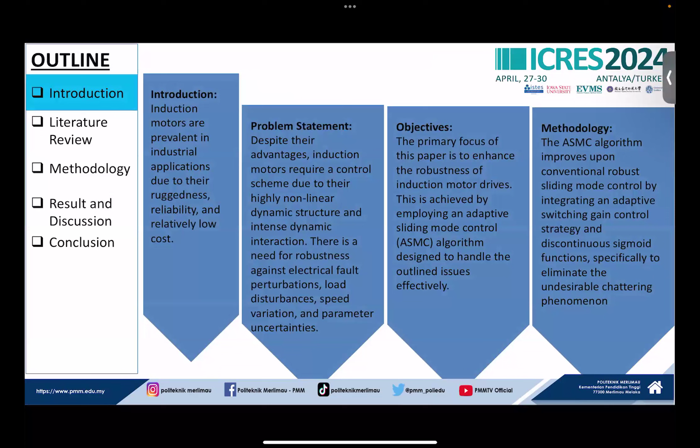So my outline of presentation includes introduction, literature review, methodology, result and discussion, and also the conclusion. So this research is basically based on induction motor drive. Induction motors are used in many applications, especially in industrial applications, because of their ruggedness, reliability and also relatively low cost compared to other motors such as the DC motor.

However, despite their advantages, induction motors require a control scheme due to their highly non-linear dynamic structure and intense dynamic interaction. There is a need for robustness against electrical fault, load disturbance, speed variation, and also parameter uncertainty. So this research focused on designing a robust induction motor drive. This is achieved by employing an adaptive sliding mode control algorithm designed to handle the outlined issues.

So the adaptive sliding mode control improves upon conventional robust sliding mode control by integrating an adaptive switching gain control strategy and discontinuous sigmoid function to eliminate the undesirable chattering phenomenon. This chattering phenomenon appears in conventional sliding mode control.

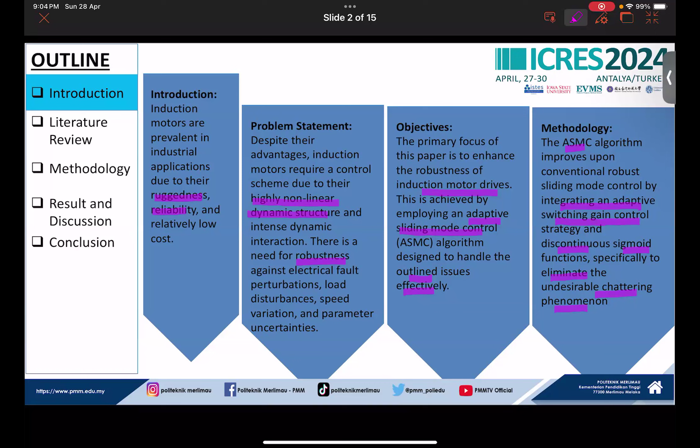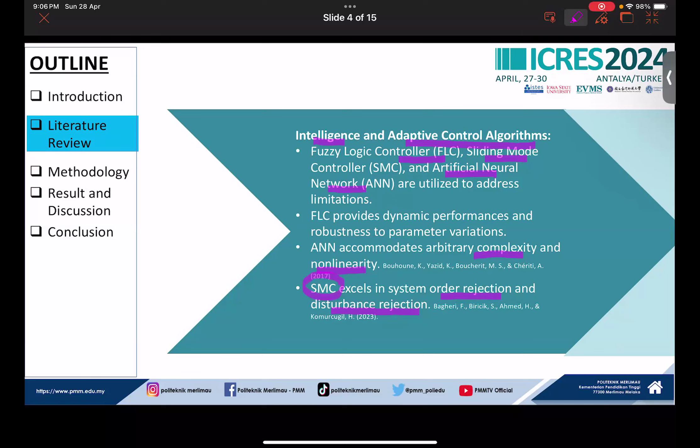Fuzzy logic controller provides dynamic performance and robustness to parameter variation. The ANN accommodates arbitrary complexity and non-linearity. And the SMC excels in disturbance rejection. So in order to deal with robustness, this study focused on the SMC application in induction motor drive.

So basically, there is the conventional sliding mode controller. This sliding mode controller has a chattering phenomenon due to large switching gain in the equation itself, in the SMC itself. This is an undesirable effect caused by external load disturbance and parameter variation.

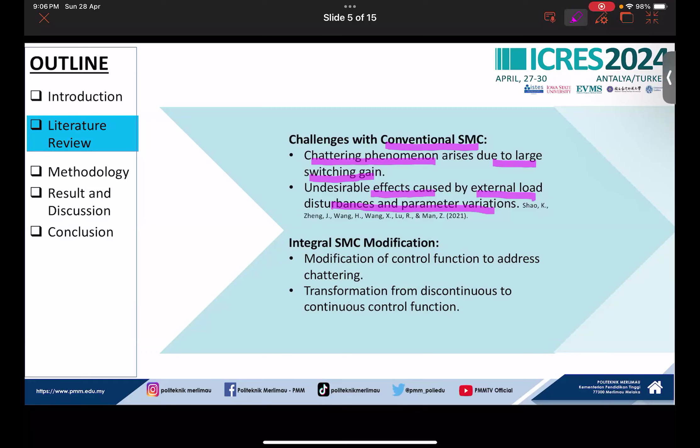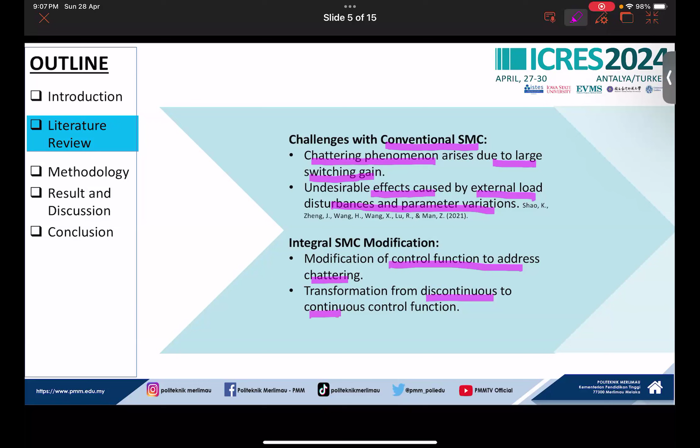So this classical SMC is technically prompted with integral SMC, a modification of the control function to address the chattering, a transformation from discontinuous to continuous control function. So basically the classical conventional SMC uses a discontinuous function, while this integral sliding mode control uses a continuous control function.

So this research also introduced the proposed adaptive switching gain control strategy, which aims at overcoming instability and achieving smoothness in control performance. And also it introduces a new algorithm, a modified classical sliding mode control with variable gain dependent on the system state, to reduce chattering and enhance its robustness.

So this is the control system employed in field-oriented control. This IFOC, indirect field-oriented control, is a widely used method in controlling induction motors. This is the speed control where the SMC, sliding mode control, is implemented in the controller. It utilizes adaptive sliding mode control for speed regulation, ensuring robust performance in varying conditions.

Additionally, we have two PI current controllers employed in the inner loop. There is an outer loop and inner loop. The PI is employed in the inner loop to process the error signal of the voltage command, enhancing control accuracy.

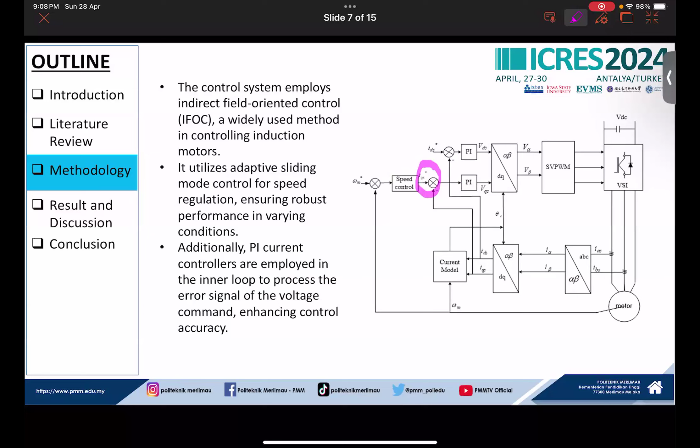So basically, this is the conventional sliding mode controller equation, where IQS is the output from the controller, the conventional sliding mode controller output from the speed control. It uses the signum function, which is 1 to -1. That is what we call a discontinuous function.

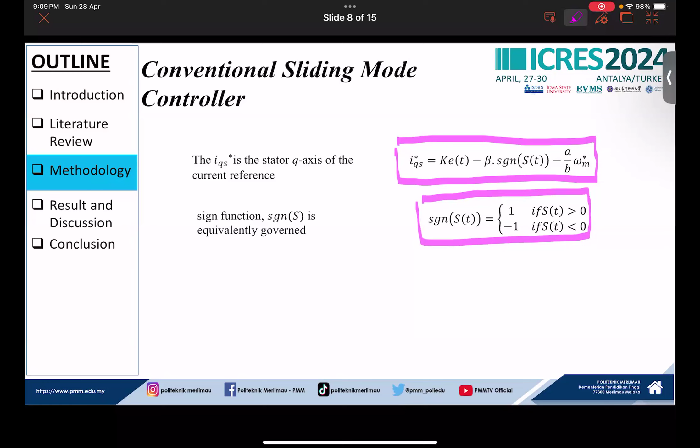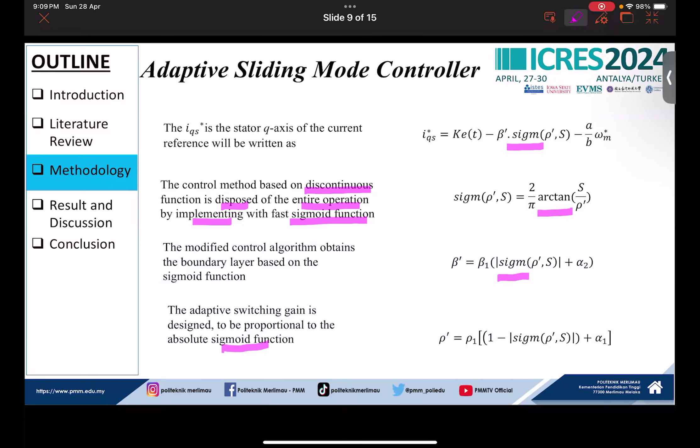So in adaptive sliding mode control, we use IQS, which uses the sigmoid function. Whereas the sigmoid function is actually using the arc tangent formula. The control method based on the discontinuous function is disposed of by implementing a fast sigmoid function with arc tangent algorithm. So the modified control algorithm obtains the boundary layer based on the sigmoid function here. So the adaptive switching gain is designed to be proportional to the absolute sigmoid function as mentioned in the formula.

So this is the result, a simulation study based on the cases for comparative performance of different speed controllers with no load.

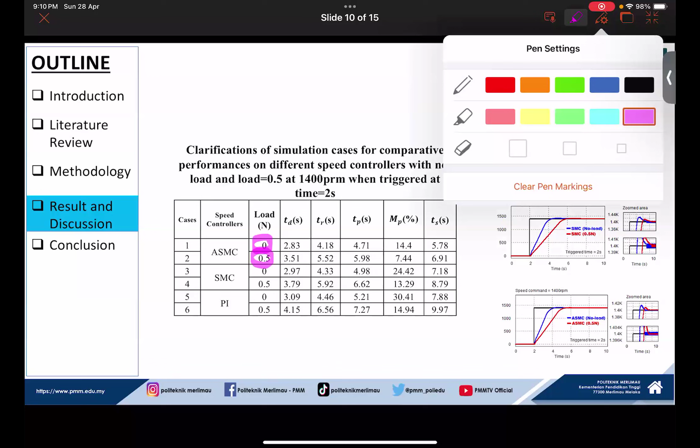And loaded condition. So we have two conditions, which is no load and loaded condition, 0.5 Newton meter. So in this table, we have three results here. This is using PI controller, traditional SMC, and also adaptive sliding mode controller. So the table shows the summary of the comparative study of the three speed controllers,

operating at 1,400 RPM. I did the research for two different speeds, which is 1,400 RPM, the rated speed, and also the lower rated speed, 350 RPM. So the induction motor speed performance is clarified using time domain specifications: delay time, rise time, peak time, and also the maximum percentage of overshoot, and also the settling

time. As we can see here, the adaptive sliding mode control demonstrates robust performance with moderate overshoot and relatively short settling time under both no load and loaded condition. On the other hand, the sliding mode controller exhibits faster response time, but at the cost of higher overshoot and longer settling time.

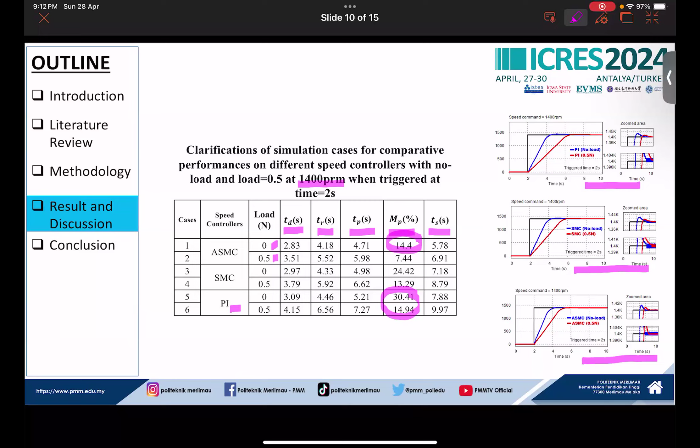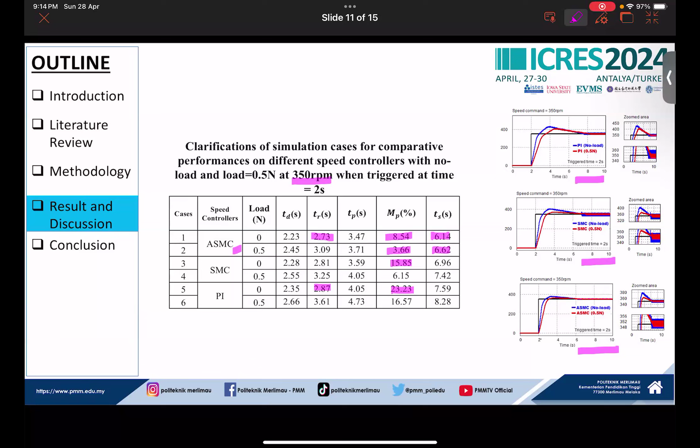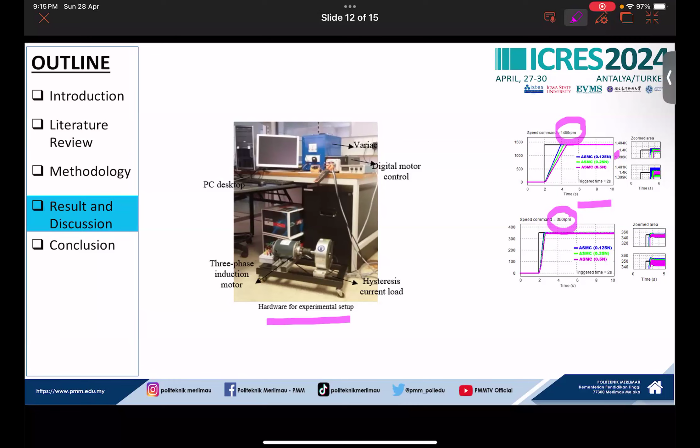So we did this experiment based on 3 different load conditions, which is 0.125 Newton meter, 0.25 Newton meter, and 0.5 Newton meter. So this is the result based on the experiment of the adaptive sliding mode controller. I classify it into case 1, which is 1,400 RPM, and case 2 for 350 RPM, where both are tested with 3 different

load conditions. In case 1, the adaptive sliding mode controller exhibits remarkable performance adaptability to different load conditions, showing rapid rise time, minimal overshoot, and consistently short settling time. As the load increased from 0.125 to 0.5 Newton, the controller maintained its efficiency with negligible deviation in its performance metrics, illustrating its robustness across the range of load.

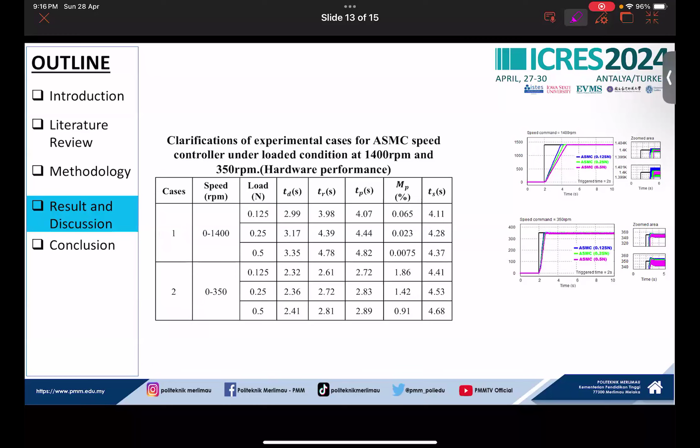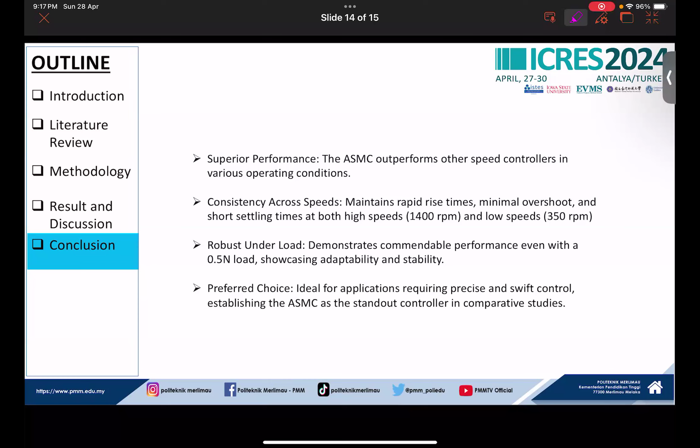And in terms of robustness under load, the adaptive sliding mode controller demonstrates commendable performance even with 0.5 Newton load, showing adaptability and stability. This shows the adaptive sliding mode controller is ideal for applications requiring precise and swift control, establishing it as a standout controller in the comparative study.